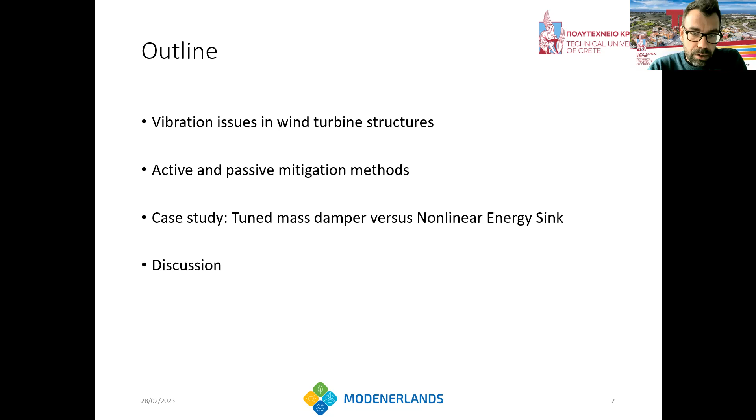So starting with why vibrations can be a problem, a serious problem in wind turbine towers. Typical wind turbine systems are exposed to a variety of loads. Onshore, they mainly have to deal with the weight of the own structure and the wind that acts upon the structure.

But since we are moving offshore, and this move to offshore locations and offshore hotspots has been the primary motivation for building up this network, because once we go offshore, several things change in terms of what we could expect and how we design a structure. So as we go offshore, and particularly for the MODENERLANDS action and the energy islands, we are talking about floating systems.

In this case, apart from the wind, we definitely have currents that are applied on the submerged part of the wind turbine, of the floating platform, and waves that also act, and they can be very, very important, very dangerous about the structural safety.

Now, the general aim when it comes to vibrations is to keep them as low as possible, because on the one hand we want to reduce the cyclic loading that the structure experiences, and on the second hand we want to mitigate excessive deformation. For example, some excessive deformations, even though we have a very sturdy structure, can lead to the structure being outside the design criteria regarding buckling or other possible failure types.

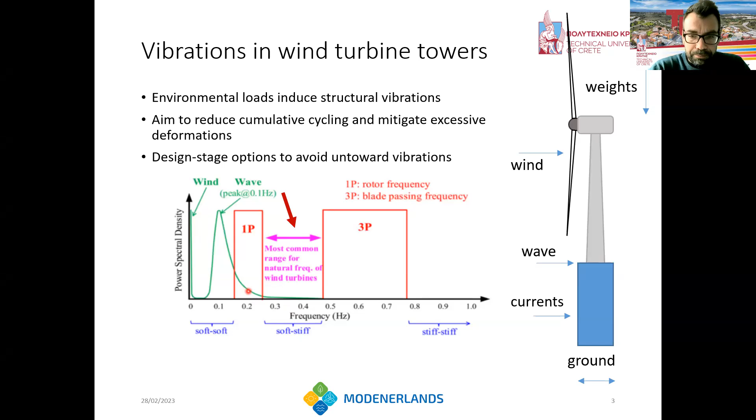Now, material fatigue - the authors of this particular paper had done an analysis for over 62 collapse cases, and material fatigue, purely material fatigue, was identified as only 7% of the failures. But it is very difficult to understand how fatigue may affect cases like bolt failures or other systems failing to do their job.

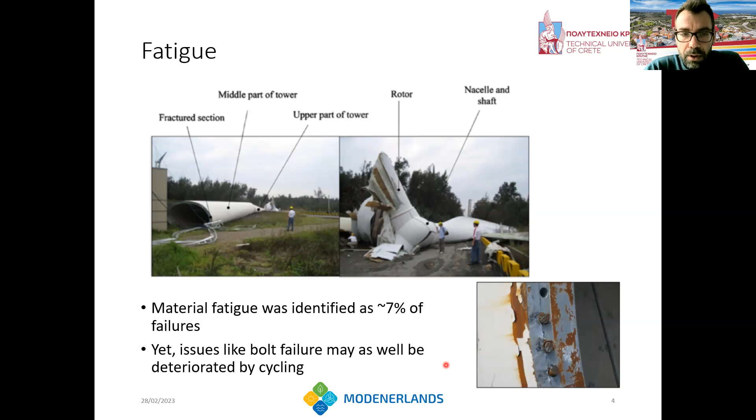So fatigue, which is directly related to vibrations of the structure, is more deeply and more difficult to identify as the root cause of a potential failure. So therefore, in the last few years, particularly in the last decade, there has been a lot of research on designing systems that can control the vibrations of the structure, not only of the tower, but of the blades as well. But the blades are relatively easier to control with respect to the tower due to their size.

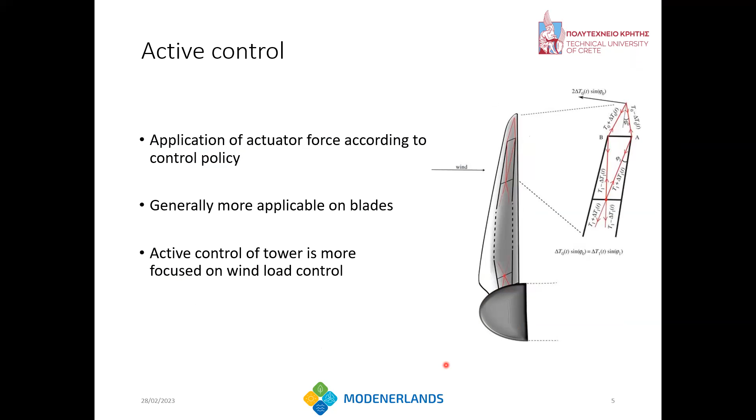So, for example, one of the most common methods used to control the vibrations of blades is active control. Active control, for those who are not very familiar with control laws, has to do with the application of an actuator force according to a control policy in the feedback loop in order to counteract the external load that creates the deformations, the vibrations of the structure.

For example, here the authors have considered a tendon system which pulls, depending on the direction, within the desired direction that wants to be pulled in order to counteract the vibrations.

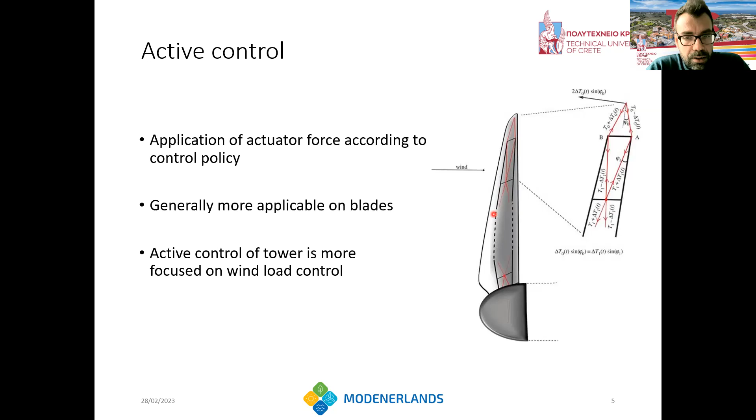This is more generally applicable on blades in terms of active control because of the difficulty we have in applying it on the tower. It's a much more massive system, it's more difficult to apply the loads, and it's not as economical as it would be for blades.

There are cases where active control has also been applied for mitigating the vibrations of wind turbine systems, and at least in theory, they seem to be working quite well.

Now, the problem here is that in theory, in models, this is very effective, but in practice it becomes quite difficult to apply the control policy that we want to input in the tuned mass damper, for example, in this case.

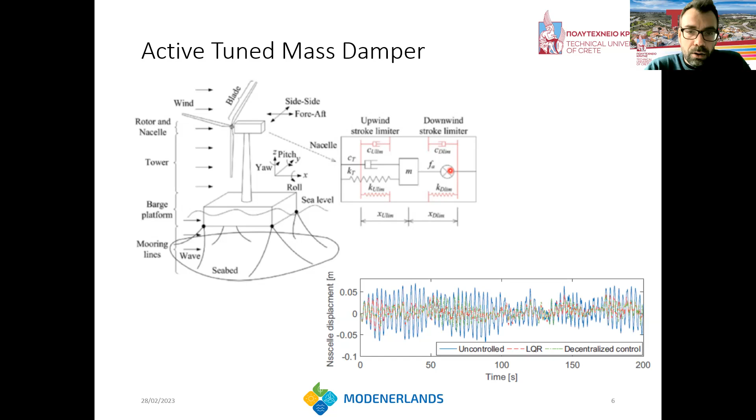And therefore, the majority of the work that has been done recently around the vibrations of wind turbine towers has to do with passive systems that do not require an external source of energy. They do not require an actuator. It's in their nature, in their design, to be able to control the vibrations of the primary system.

And when we talk about passive control systems, we are mainly talking about what you might have heard as tuned mass dampers. Tuned mass dampers are based on developments done in the 50s by Den Hartog. The main idea is, when you have an oscillator, to attach a secondary oscillator of much smaller mass and tune the properties of the stiffness and damping such that when the excitation comes along on the primary oscillator, most - or at least in theory all, but in practice most - of the vibration energy is transferred to the secondary structure, leaving the primary structure unaffected.

So a sketch of how this could be realized in a wind turbine system: usually authors consider applying the tuned mass damper in the nacelle, attaching the nacelle with a spring and a damper, which is expected to reduce the vibrations of the nacelle and therefore the stresses developed on the tower, the bending stresses at least. The main idea in Den Hartog tuning is to match the frequency of the primary system and to properly tune the damping.

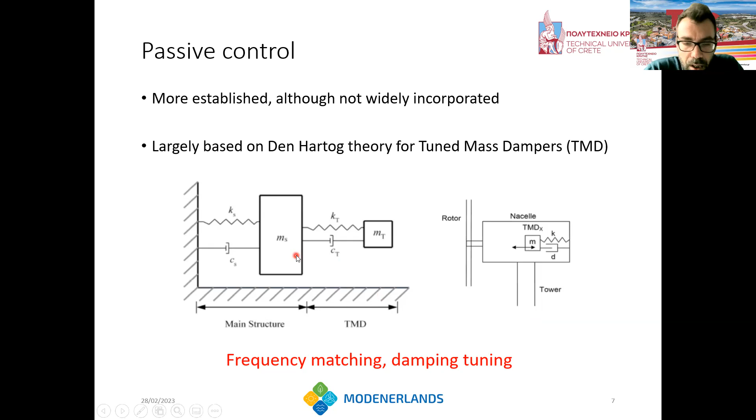Now, the problem with tuned mass dampers is that although they are very effective at the tuning frequency, if you have an excitation that acts upon the natural frequency of the system, you can feel very safe that the tuned mass damper will do a very good job mitigating this vibration. The problem is that in many systems, particularly those interacting with environmental loads, you have multiple frequencies, and even in the case of offshore wind turbine systems, multiple different loads acting on your system.

And then the tuned mass damper becomes an inefficient tool, at least for most of your loads. So it's definitely not a one-fit-all solution - we cannot act upon the majority of the frequencies and loads acting on the system.

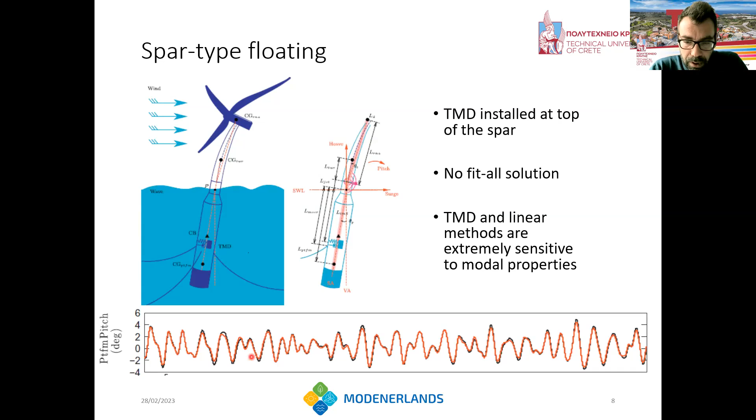Therefore, generally, all the linear methods of trying to mitigate vibrations of host systems are extremely sensitive to the modal properties of the system itself. So most of them can only act against one particular modal frequency. This is a problem when you have systems like wind turbines interacting with a variety of loads, particularly stochastic loads that are distributed and have a spectral distribution across a considerable range of frequencies.

There are some alternative methods, like the tuned liquid column damper, which has been well developed and designed to fit a variety of different platform designs. We can see, for example, in some simulations that the authors have performed, the characteristic curve of a linearly controlled system. Here I've drawn what you'd expect without the tuned liquid column damper versus when you let it operate. The idea is you have two columns connected with a horizontal column filled with liquid, and as the system vibrates, liquid moves from one column to the other through an orifice that creates damping.

This introduces a frequency-tuned effect on reducing the vibrations of the system.

The problem, though, and the reason why passive control systems haven't fully taken off despite developments, is that it's not good value for money so far. That's because tuned mass dampers and linear systems can act against one particular frequency, or at least a very close region around it, so the normal procedure is to tune them to the natural frequency of the structure. However, this doesn't mean we can mitigate all, or even the majority, of the dangerous vibrations that can occur. A good portion is mitigated, but there's still a residue which can introduce significant fatigue damage and issues in wind turbine systems.

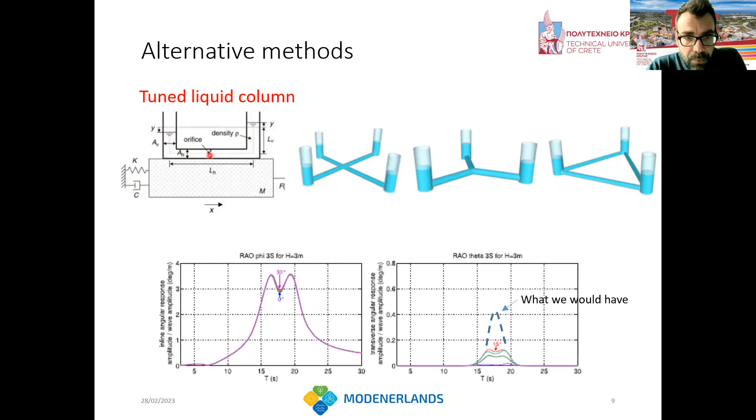There have been more advanced explorations and investigations. For example, apart from introducing a tuned mass damper in the spar, some authors have considered using pendulum dampers, and this concept of the pendulum tuned mass damper has also been commercialized. There's a German company, ESM I believe, who have commercialized the pendulum tuned mass damper. It's still early in terms of market acceptance, but there are signs that the market is accepting and investigating such solutions.

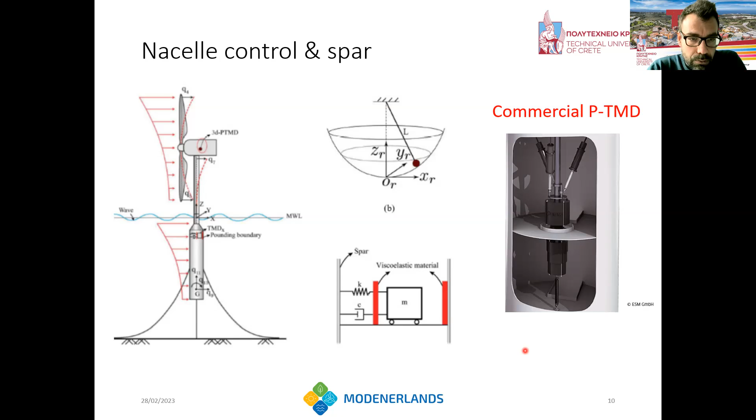This is also reflected in the fact that, for example, the OpenFAST algorithm, the main simulation tool used for wind turbine systems, created by NREL, has included a specific subroutine for introducing tuned mass dampers into the response and dynamics of wind turbine towers. Therefore, it's expected that in the next few years, as these structures become larger and more prone to vibrations, such systems—mostly passive, though there's important work in active systems as well—will become a more everyday solution for wind turbine systems.

Now, the problem is also demonstrated in the results of the previous system. Even though there were two tuned mass dampers in the system, it was very difficult to control both the fore-aft and the side vibrations. So although, when the pendulum was installed on the nacelle as shown in this figure at the bottom left, the displacement vibration of the nacelle was greatly reduced, the side vibration was almost unaffected at all.

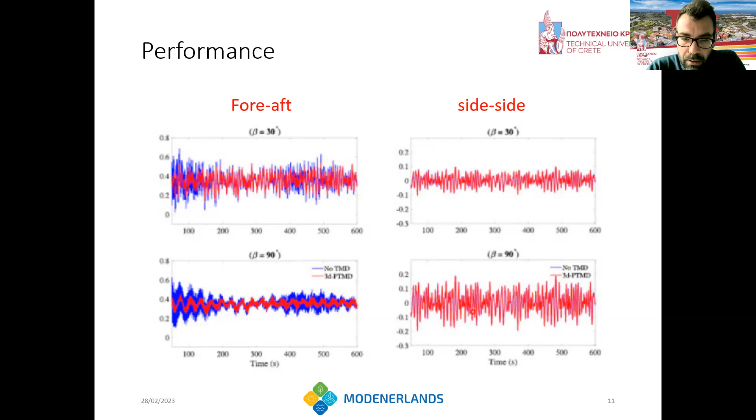This can also be seen in multi-load situations. When the pendulum tuned mass damper is installed, there's a massive reduction of the primary resonance of the structure. However, the response to waves remains unaffected—the tuned mass damper cannot communicate with the energy input into the system from waves. The same applies to turbulence, shown at the bottom left of this axis, because the tuned mass damper is a device that acts on one particular frequency, one particular mode of the structure, and it's very difficult to have it control different loads or modes simultaneously. And of course, there's also the directionality issue.

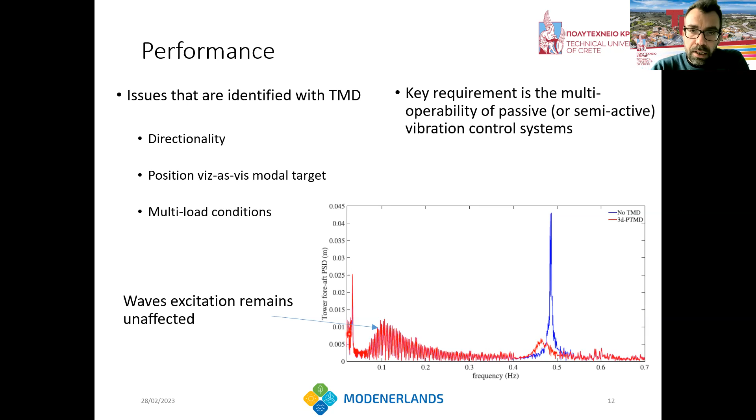So a key requirement for efficient mitigation of vibrations in wind turbine systems is to have systems that are able to adjust to different loads and different properties in the excitation of the turbine and the tower.

So let me now move to a case study in which we considered a nonlinear energy sink versus a tuned system, a tuned mass damper. Let me start with what we used. We used the standard 5 megawatt NREL system, which is something that most authors consider in order to have a baseline understanding of the analysis and the system they're proposing.

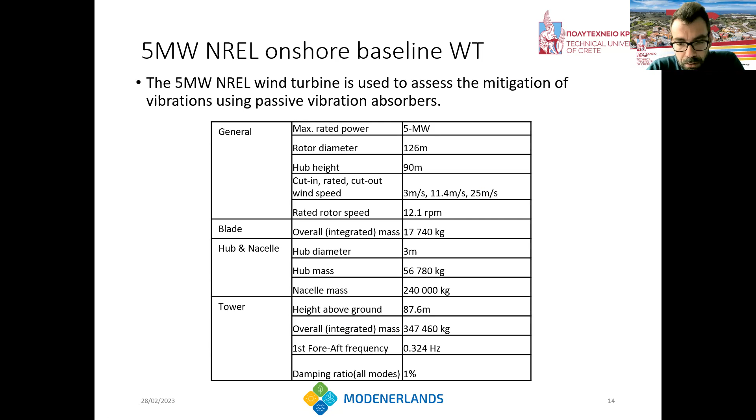The analysis was performed initially on FAST because it gave us the opportunity to have a more complete response determination, including the mass damper as well. But following that, because FAST is generally more computationally ineffective in terms of the time required, we reduced the model and considered only the fore-aft.

Using finite element analysis, one can simulate a wind turbine tower with a number of modes as required. In this case, we consider only the fore-aft vibration, so we can consider the tower as a simple cantilever with a tip mass. What we are actually interested in

is the displacement of the nacelle. So effectively, what we have in the analysis is a single degree of freedom system which is equivalent. It's trying to simulate the response of the nacelle in the fore-aft direction, the first mode, the low frequency.

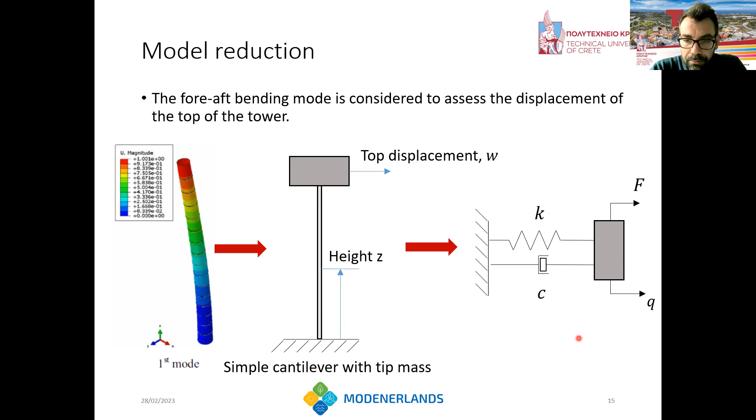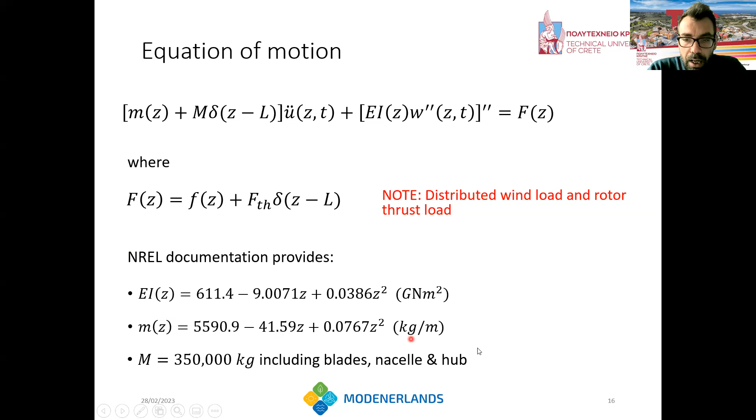Now, some background on the model that we developed. We did the model reduction using the first mode. These were taken from NREL documentation of the 5 megawatt turbine, which gives the mass distribution, the mass of the nacelle, and the structural properties.

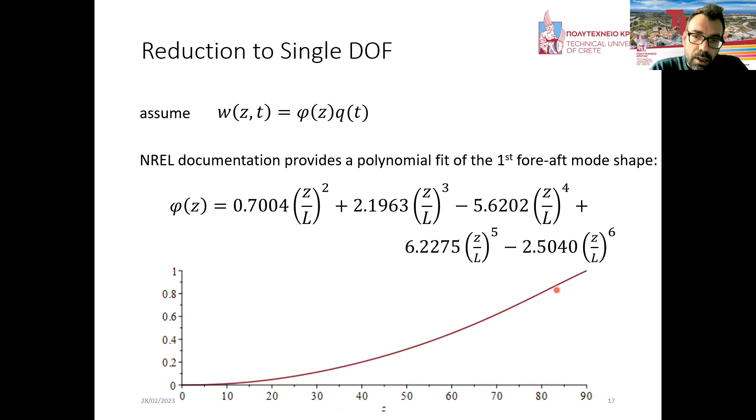The first mode was also used from the NREL documentation, which you can see in the mathematical formula and in the graph below that. Using a modal decomposition, we transformed the equations of the cantilever into a single degree of freedom system, basically describing the vibrations of the first fore-aft mode, using this formula to compute the coefficients.

Now, the first thing we wanted to do is have a sort of validation of what we are doing here, because we didn't want to model something completely irrelevant. The fore-aft frequency in our model was 0.33 hertz, whereas NREL gives it as 0.324, which is very, very close to what we wanted. This is something we expected, but it's a first indication that we are on the right track of having a very simple reduced model for the vibrations of the system.

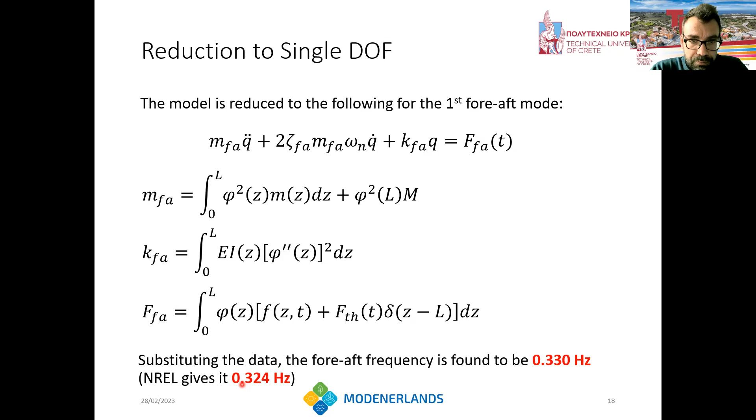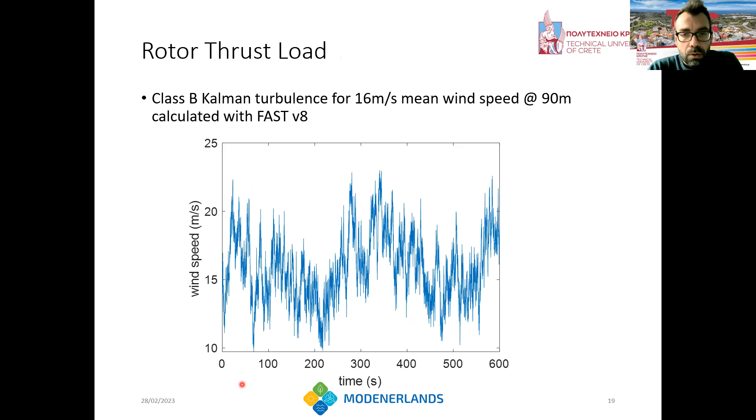Now, later we used a Kaimal turbulence model for a moderate wind at 16 meters per second mean wind speed. We calculated this with version 8 of FAST, and this was used in order to excite the vibrations of the wind turbine structure.

Now, for the thrust load, we performed an FFT analysis in order to identify the frequencies. We were expecting the 3P to be very important, and we also expected to see the turbulence in the lower end of the frequency axis, plus some contribution from the free response, the fore-aft frequency of the wind turbine itself.

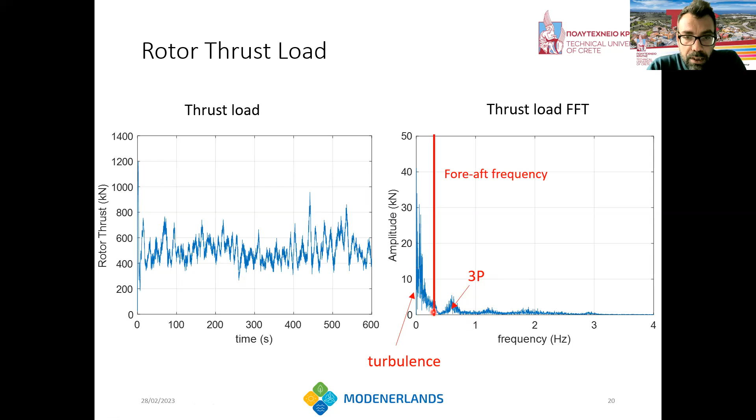So basically, we can do an analysis, first validating the SDOF model, the single degree of freedom model we developed, against the results from FAST, which is a much more complete set of calculations. The tip deflection had very good agreement. The nacelle deflection had very good agreement with the data given by FAST, both in the time domain and in the frequency domain. Therefore, we concluded that the SDOF model was reasonably good to proceed to the evaluation of the vibration control methods.

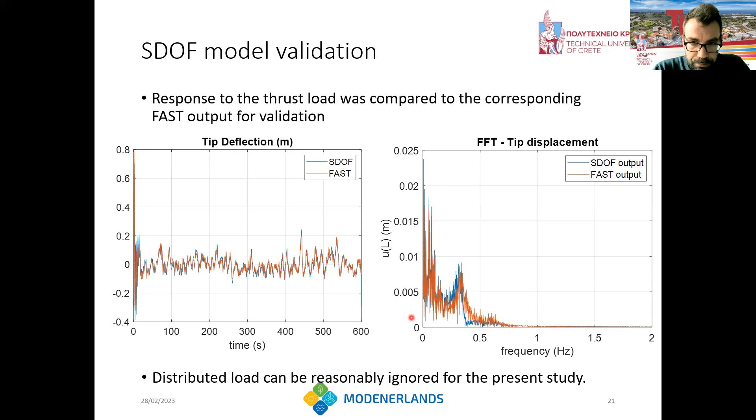So, doing a wavelet analysis in the time history of the response, we're looking at how the vibration energy is distributed across different frequencies at different time instances of the response, and we notice three major distinct characteristics: the free response, the fore-aft frequency of the system; the 3P forced harmonic component coming from the thrust load and the rotation, the deterministic variability of the aerodynamic load; and last, the turbulence, which is the random part of the wind load.

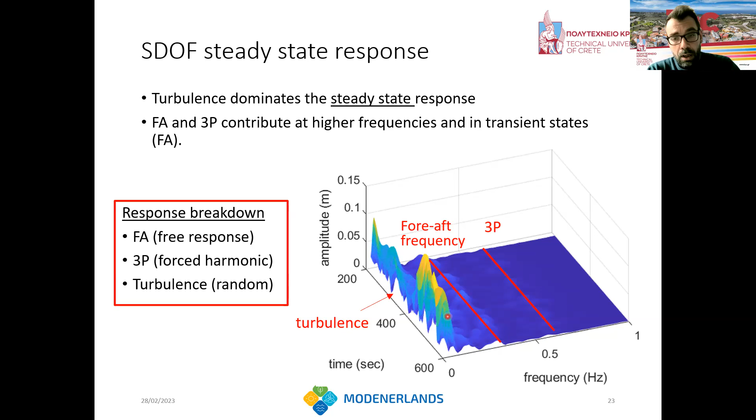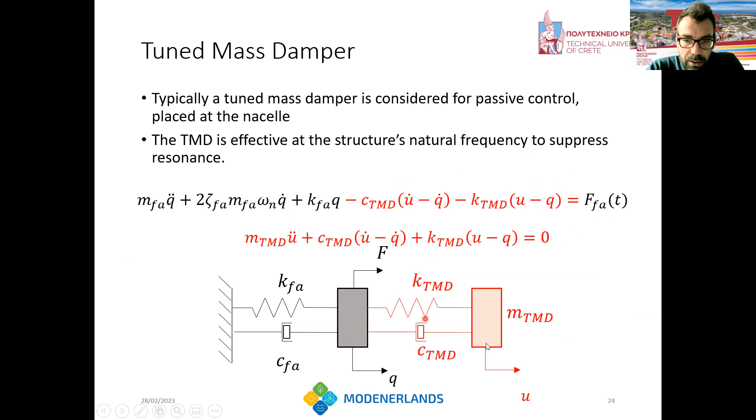The first thing we did is have a baseline analysis for the tuned mass damper. In order to introduce a tuned mass damper into our system, we included a second degree of freedom containing its parameters. So basically, we're modeling the introduction of an additional mass on the primary oscillator, and we tuned it based on Den Hartog tuning. We chose a 5% mass ratio and calculated the necessary natural frequency and damping ratio in order to have optimum performance, and we can see in the free response that the tuned mass damper was actually tuned well.

We have a very good mitigation of the tendency of the structure to vibrate. Of course, this is something you don't expect in the normal operation of the wind turbine, but it's very indicative of whether an absorber control method you're developing is capable of having good performance in mitigating the vibrations at the particular frequency it's tuned to.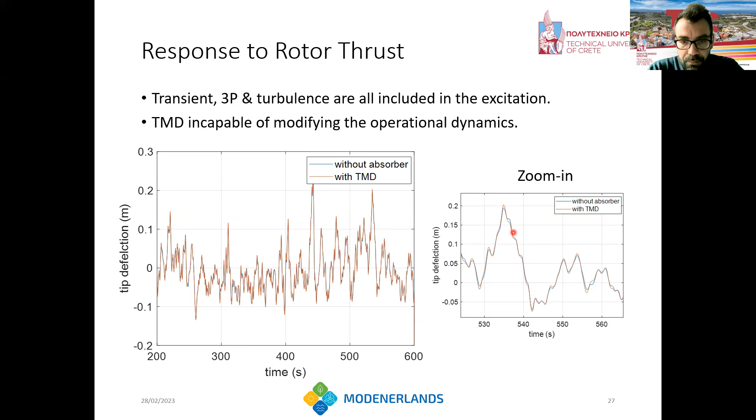Now, having this data in mind, we started with a very crude evaluation of a nonlinear energy sink. Before moving to the results, let me briefly describe what a nonlinear energy sink is.

The main characteristic of a linear tuned mass damper is that it has a spring with a constant spring constant. That's why we call it a spring constant. So the restoring force of the tuned mass damper is K times X, the stiffness of the spring times the displacement.

The main characteristic of a nonlinear energy sink is that we break this linearity constraint and intentionally introduce nonlinearities in the restoring force of the absorber. So instead of having this linear curve, we use a polynomial curve. Usually, at the first stage of implementation, a purely cubic restoring force is considered.

The main advantage here is that the nonlinear energy sink does not have a preferential frequency. It doesn't essentially have a natural frequency. You may define some instantaneous natural frequencies depending on the deflection, depending on the amount of energy that the nonlinear energy sink has. So effectively, the NES is a vibration control method completely decoupled from the frequency of your excitation, but at the same time it can work differently for different frequencies at different energy levels.

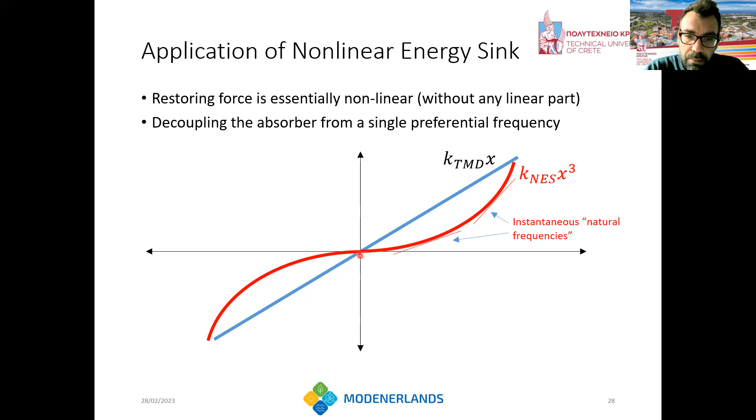So if you're vibrating at high amplitudes, you can act upon higher frequencies. If you act at lower deflections, the frequency becomes lower, to the limit that it becomes zero, at least in the theoretical models. This has found several applications, even in large structural systems.

You see here an application in a 6-story building where an NES was installed with pyramid elastomers acting as the nonlinear springs. It was installed at the top floor, and you can see there was very good mitigation of a relatively transient multi-frequency load. You can compare the response without the NES, or with the NES locked in place, versus with the active NES, where it was allowed to absorb energy from the system.

There is a very big framework developed by Professor Vakakis at the University of Illinois and many other authors for the development of this NES system. We have found many applications in structural and mechanical systems.

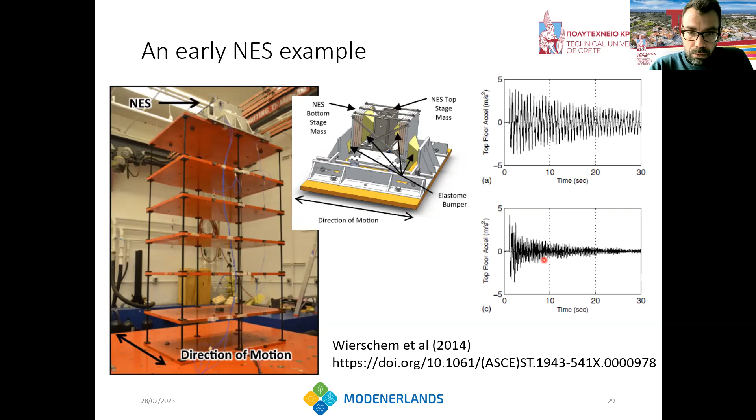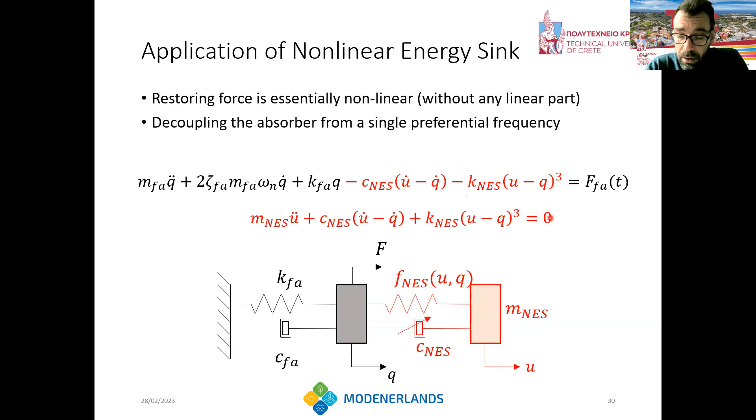In this case study, we consider applying this to wind turbine systems and exploring potential benefits for the mitigation of the environmental loads. To do this, we need to change the restoring force in the initial tuned mass damper model. By adding a cubic term to the restoring force, we start modeling a system with an absorber that doesn't have a preferential frequency.

The first step is to see what happens at the preferential frequency for the TMD, which is mostly effective at the tuning frequency. The next step is to evaluate whether the NES is equally effective at this tuning frequency without essentially having a preferential frequency. This can be done by looking at the free response of the host primary system and comparing it to the performance of both the tuned mass damper and the NES.

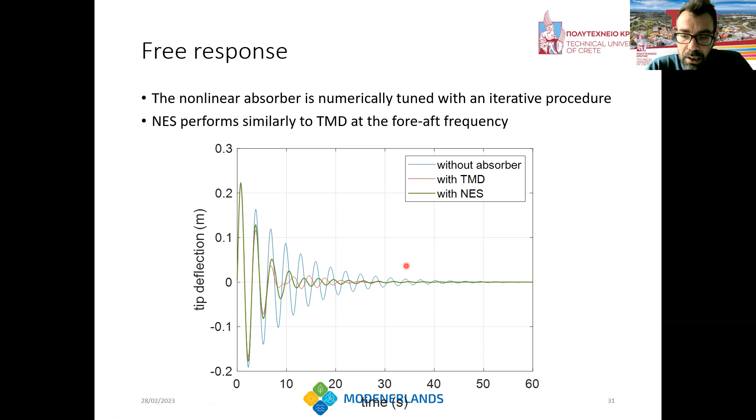You can see that although the TMD is slightly better at the free response, the NES is almost equivalently efficient in mitigating the initial vibrations, the free response of the wind turbine system, the structure. Therefore, that's a first tick for the NES because it has essentially cancelled the advantage of the tuned mass damper. Now the second step is to see what happens at the alternative response regimes.

In this slide, we are applying a harmonic load at 3P. We notice that when the TMD was completely incapable of reducing the vibrations of the primary system, the NES can lead to more than 50% reduction in the amplitude of the vibrations.

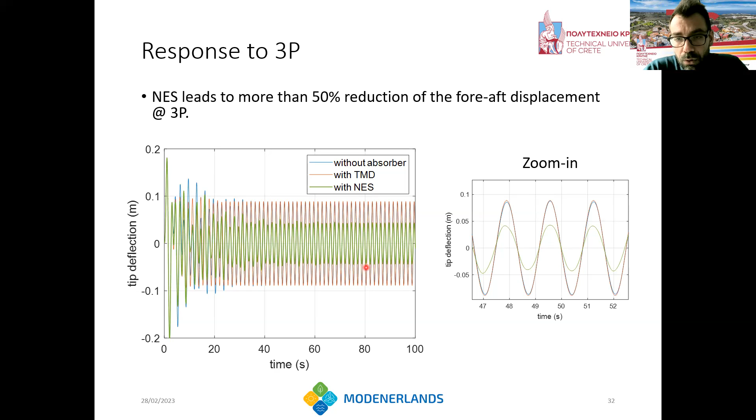The first thing that we can establish from this result is that we can have a vibration absorption, a passive system that doesn't require an external amount of energy, external input of energy, that can act at different frequencies, at loads that act on different frequencies. This is a very important result, which is encouraging us to continue with the analysis further on.

Now, we have also looked at how the NES can interact with turbulent energy that comes from vibration, energy that comes from turbulence. There is a marginal improvement, although it's not what it could have been because of the limitations that we had in this study in terms of tuning the NES to work with turbulent loads.

We are very optimistic that this development has... we can expect that it will have a very good performance for turbulence as well, because the NES has also been tested for blast explosions or blast loads from explosions and other things that are very broadband. Therefore, we can expect that the proper tuning of the NES can also be able to act against completely random events.

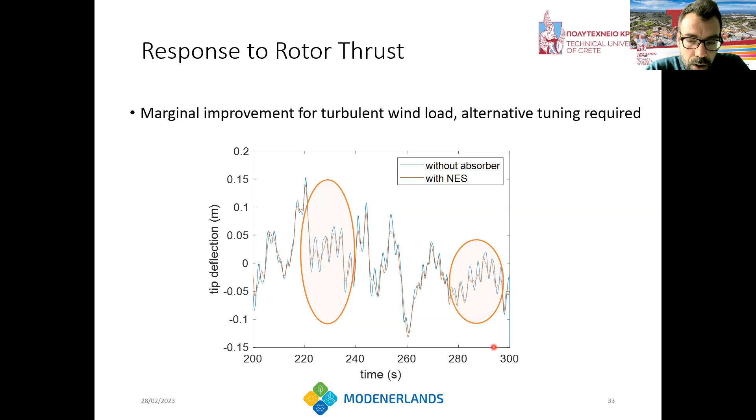So just a slide to recap some of the things that we have seen, particularly for this case study. We've seen that the NES was able to act against multiple frequencies, something that a tuned mass damper system would not have been able to do. There was a definite conclusion from the data that the NES can outperform the TMD when it comes to different frequencies.

What we have identified as the next step for investigation is to tune the NES to act against turbulence and extreme transient events. Thank you very much. I hope it has not taken longer than you were expecting, and I'm happy to answer any of your questions.

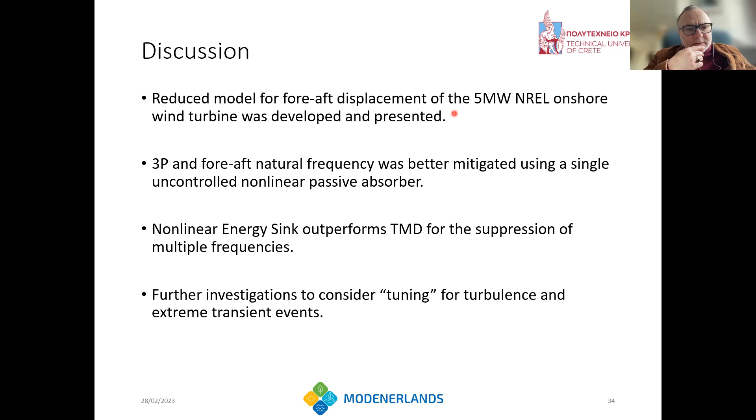Thanks, doctor. My name is Amya. I'm working on something related to using the tuned mass damper for controlling tower vibration. Recently I've been working to optimize the parameters for the tuned mass damper, like tuning the frequency ratio or mass ratio. So for your case with the nonlinear energy sink, is it possible to optimize the parameters to get better results in cases like turbulence?

Yeah, not only is it possible, but it's necessary, because tuning an NES can be a much more cumbersome task since you have to involve nonlinear invariant manifolds. It's not the standard way of looking at the frequency response. We don't have an analytical solution like you have with the tuned mass damper, so it's not as simple as setting the frequency response equal to zero or minimizing it.

It's absolutely necessary to have a tuning framework, but the key issue is that you're not tuning your NES to a certain frequency—you're tuning it to a range of operation, particularly a range of energy operation. For example, you can tune it to high energies, meaning you suppress vibrations that come with high energy and let low energy vibrations pass through, which is very beneficial for your structure. The good thing is you can take a random or broadband impact load and still achieve a very good separation ratio. The magnification or reduction factor can become very efficient.

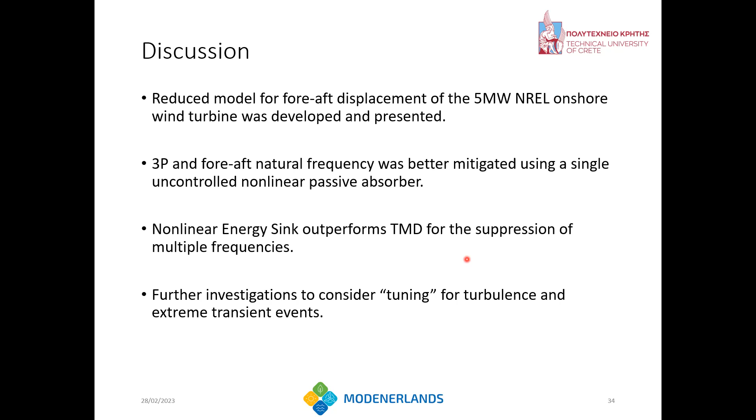A few days back when I was trying to simulate the tuned mass damper with a damaged platform buoy, I wasn't able to reduce the pitch motion, although it did reduce the surge motion. So maybe the NES would perform better for that. I'd like to thank you again for this beautiful presentation.

There's something that in most cases is not accounted for: the nonlinear wave forcing. The excitation of the waves is mainly concentrated where you see the peak, which is the main frequency of the sea. But if you model nonlinear waves, you'll see some small peaks around three times that main frequency. So if the main frequency is at 0.1, considering fully nonlinear waves, small peaks will appear around 0.3 to 0.35. These contributions are the higher order harmonics contained in realistic sea states, especially severe sea states.

These severe sea states are normally associated with wind speeds above the cutout velocity, so the wind turbine is turned off at that point, and when turned off it has dramatically low overall damping capabilities. It happens that these nonlinear wave contributions perfectly meet the first natural frequency of the turbine, which, as you said, is around 0.32 hertz.